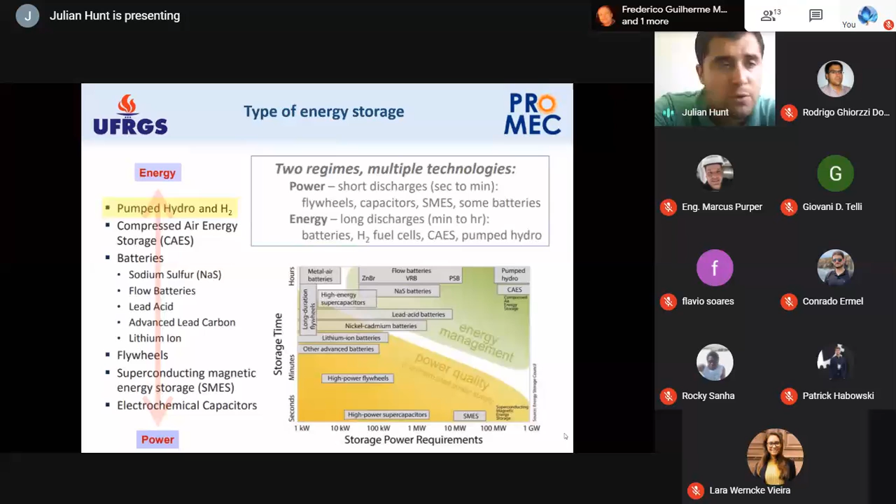You can liquefy and store it in tanks. Of course, you have some evaporation, because hydrogen has to be kept at very low temperatures, minus 253 degrees. But as the hydrogen evaporates, you can use the evaporated hydrogen, for example, to operate a generator and generate electricity for the plant. And you can use it for cooling, and for several other means.

Now I'm going to talk about the current trend of hydrogen and why a lot of people are paying attention to it. One reason is the oil and gas industry has not been very interested in investing in hydrogen - it has never been interested in investing in sustainable energies, because it always thought people would need oil, and oil would supply the world. If you stop producing oil, people are going to starve - you're going to have lack of food and a lot of problems in developing and developed nations. And this is true, right? We need a source of energy to supply our energy needs.

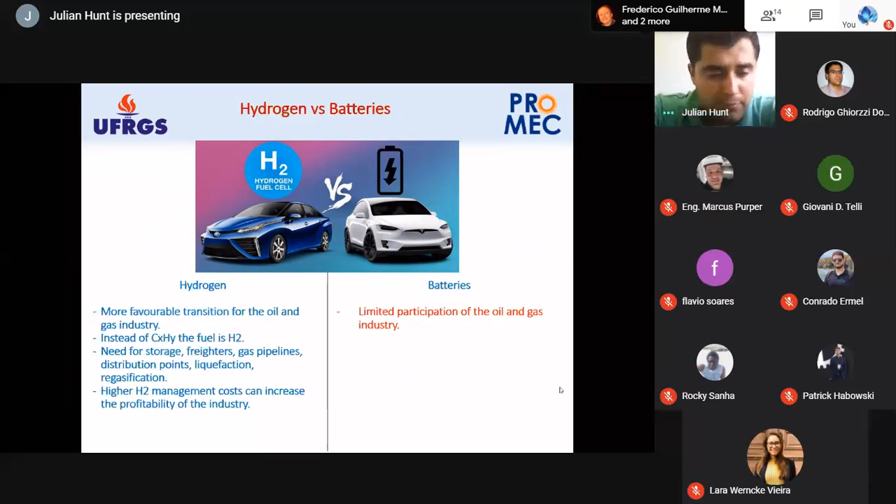So batteries are going to be very good for the electric sector. The electric sector will have 30%, 40% more customers to sell electricity. But on the other hand, the oil and gas sector will have fewer customers to sell their oil products.

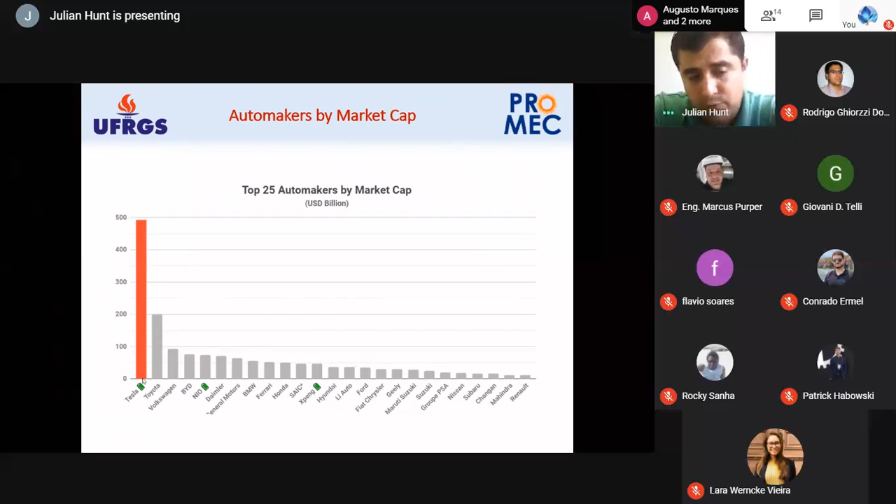This is the market capital of Tesla today. I always update this graph when I present it, and the difference keeps growing. For example, Tesla shares are worth around $500, and if you sum the six next ones - Volkswagen, Toyota, BYD, NIO, Daimler, and General Motors - then you have the market capital of Tesla. So Tesla has a lot of money and a lot of power with this money. They can change policies, they can build cheaper cars because they just have a lot of money. A lot of people are trusting in the company and investing in it.

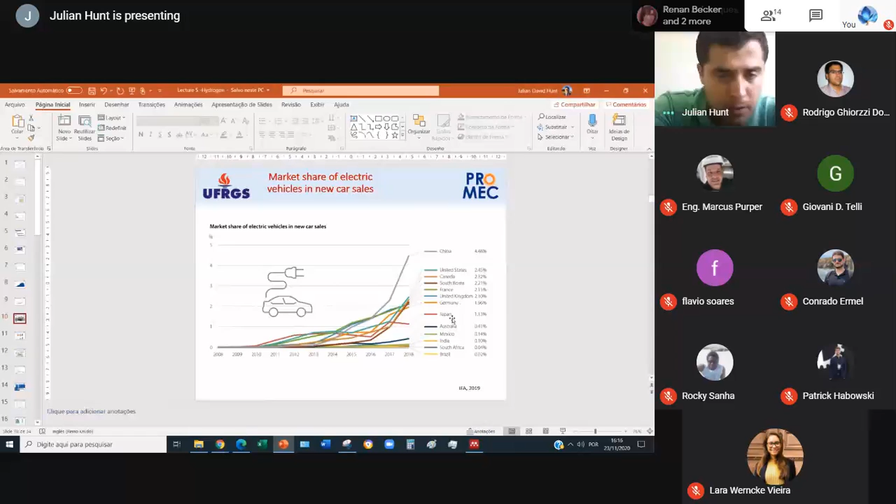It has to be either batteries or hydrogen, which is the future, right? But it will have a lot of impacts in every country in the world. So battery infrastructure requirements - you just need a plug-in. You don't even need to change the oil because you don't have an internal combustion engine; the engines are much simpler.

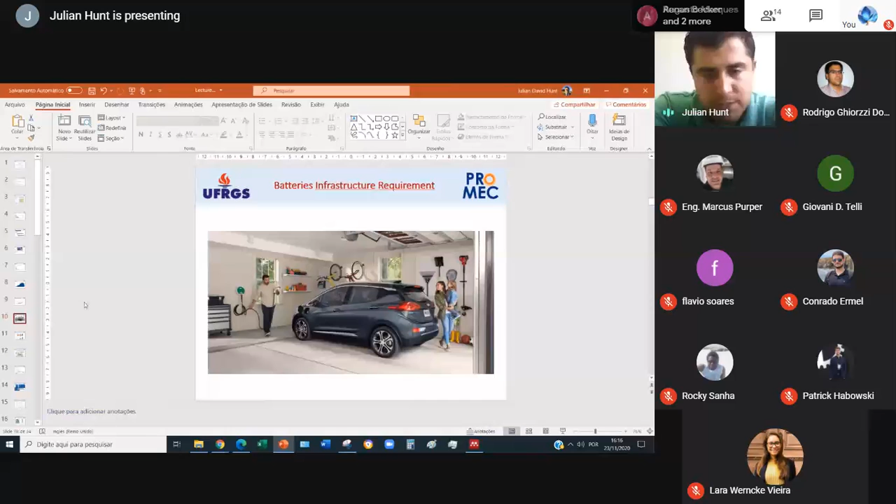So maintenance cost is much smaller, the complexity is much smaller, you don't have pollution - it's just electric.

And as I showed you prior in the first lecture, who is going to benefit a lot from this is the electric sector. The electric sector is going to make a lot of money, they're going to have a lot of jobs, they're going to have to increase their generation capacity and increase money investment in distribution, for example.

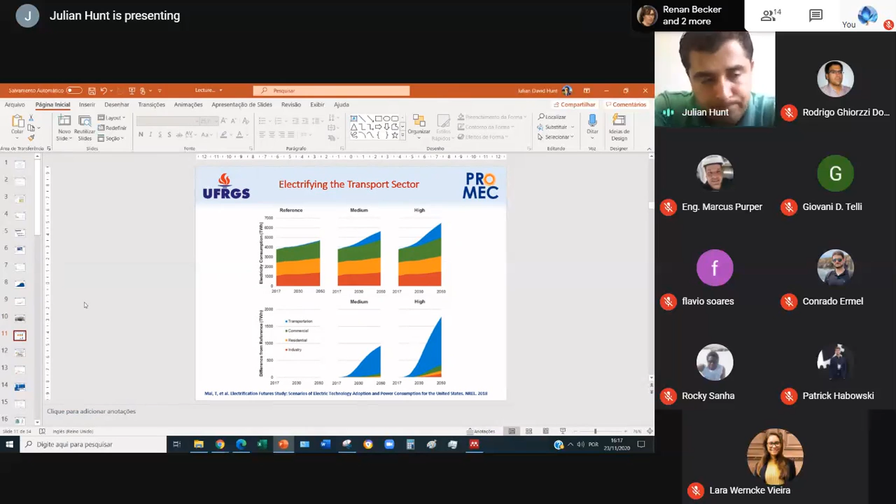Battery cars could even help with distribution because they can store energy, for example at night when people are not driving and the distribution system is sleeping, not being used. Usually transformers blow up around 4, 5, or 7 in the afternoon when demand is very high and they can't sustain the charge, so they explode. At night, transformers only explode if there are very high winds, thunderstorms and things like this - not really due to capacity of the transmission or distribution line, but more due to physical constraints.

On the other hand, a hydrogen supply future would look very similar to a natural gas industry, not so much an oil industry, but natural gas. You need pipelines, storage tanks, petrol stations, refineries - pretty much all the infrastructure that an oil and gas company has.

And the other problem is, if you don't need more of this infrastructure for gas, what happens to the petrol stations - they will have to shut down and the location won't be worth anything anymore because you won't sell to another oil and gas industry. You have to decommission all your pipelines, lay off people, which costs money, and you may have to go bankrupt. One of the options when going bankrupt is to ask the government to pay the bill.

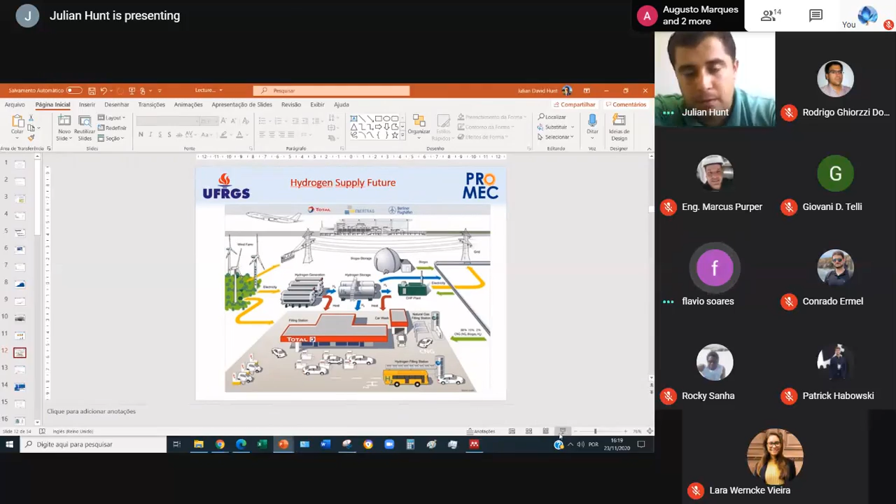142 megajoules per kilogram high heat value. High heat value assumes that after you burn hydrogen, you still manage to convert the steam that you produce into water. You also take the heat from the steam to condense it and put it back at 25 degrees - that's high heat. So the energy density of hydrogen at low heat value is around 120 megajoules per kilogram.

And the other fuels also have similar adjustments. We in Brazil, in Europe, usually use low heat value. In the US, they usually use high heat value. I'm not sure if you're aware of this terminology - if you want me to better explain, let me know.

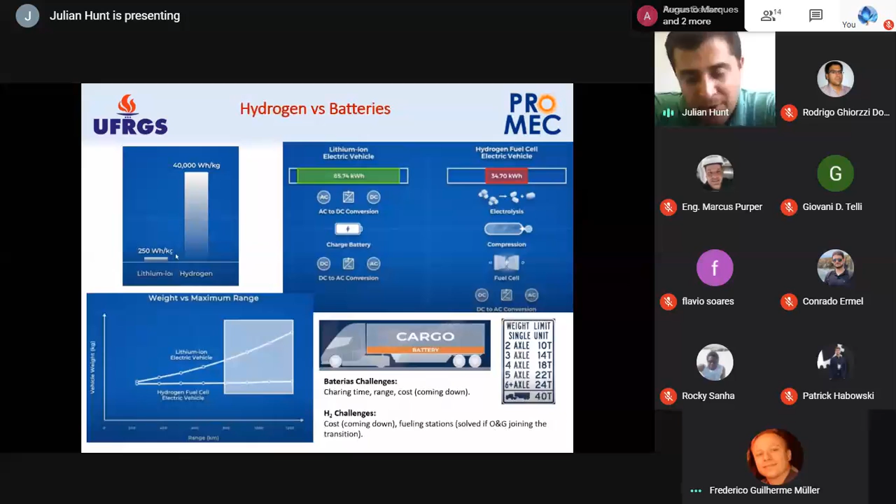I have no idea, so I'm just guessing a value here. I have no idea. But yes, I'll look at this in the battery lesson. Very good, perfect question, I'll have a look. All right, all right.

Thanks. But for example, this graph shows that battery planes will be very difficult to be feasible, because if you look at batteries and hydrogen, the differences are huge. And in a plane, weight is very important. So I think it's going to be very difficult to see battery planes in the future.

There's another thing nowadays: people are developing hydrogen batteries. What is a hydrogen battery? There are nowadays cell phones which run on hydrogen, but you don't fill up in hydrogen.

You have your phone, which has a slightly bigger storage battery. Once you plug in, you have two storage vessels inside the cell phone which split the water into hydrogen and oxygen, pressurized, at high pressure. When you unplug and want to use your phone, the phone turns the hydrogen and oxygen back into water, and you use your phone. So it's similar to a battery, but it's a hydrogen battery, not a metal battery like a typical one.

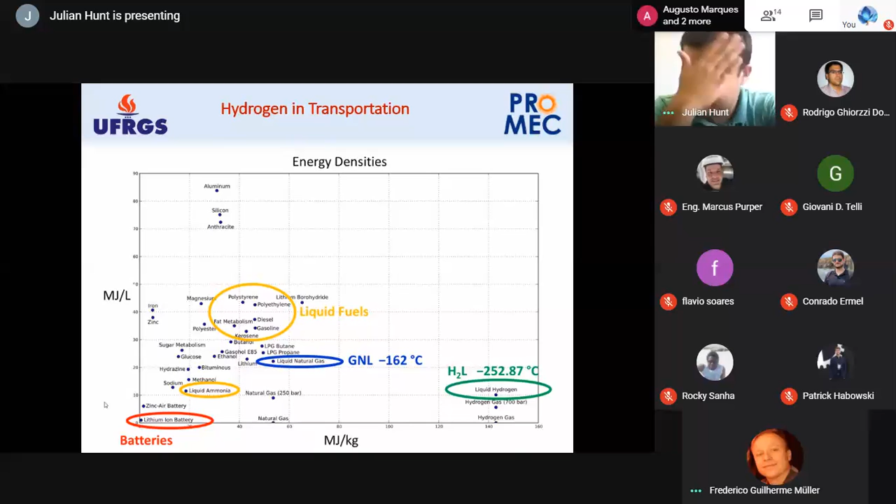This is interesting, I'll Google if I find one smartphone. I saw one right now, it's called Red Hydrogen One. I don't know if this is the one. I found it for $1,200, but I don't know if that's a little too much for me. So the only difference is that the battery lasts longer. I wasn't sure about this, I thought it was still in the research stage, but apparently they're selling hydrogen phones now. Incredible.

Those fuel cell types: you have two main fuel cell types, the proton exchange membrane cell and the solid oxide fuel cell. The main difference is that in the proton exchange membrane cell, the atom that passes through the electrode is hydrogen—protons, not hydrogen itself, just the hydrogen ion, the proton. It passes through the membrane, and the electron of this hydrogen goes through the electric system, and then you can use this current for electricity generation.

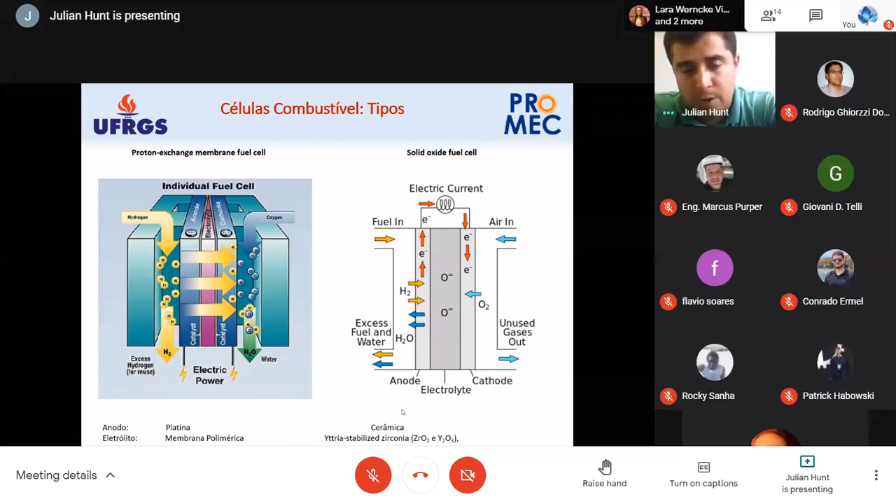So here we have another comparison, in a table, easier to follow. The operating temperature of proton exchange membranes is 80 degrees, solid oxide is 750. Proton exchange membranes take seconds, so you can drive a car really quickly - a sports car. Solid oxide takes longer, so it's going to be a car that accelerates more slowly, taking some time.

Maybe what you can do is put a battery pack to give you power for acceleration, and when you reach a certain speed, you run the oxide fuel cell to recharge your battery and provide power. Of course, you can always find a solution for the challenges you have, whichever technology you use.

Power density - it's lighter, so you have higher power for the amount of weight you carry, than oxide fuel cells. Oxide fuel cells are heavier - half the weight again, double the weight, or even 10 times the weight, depending on the fuel cell you use. Overall efficiency is 40% versus oxide fuel cell at 50%.

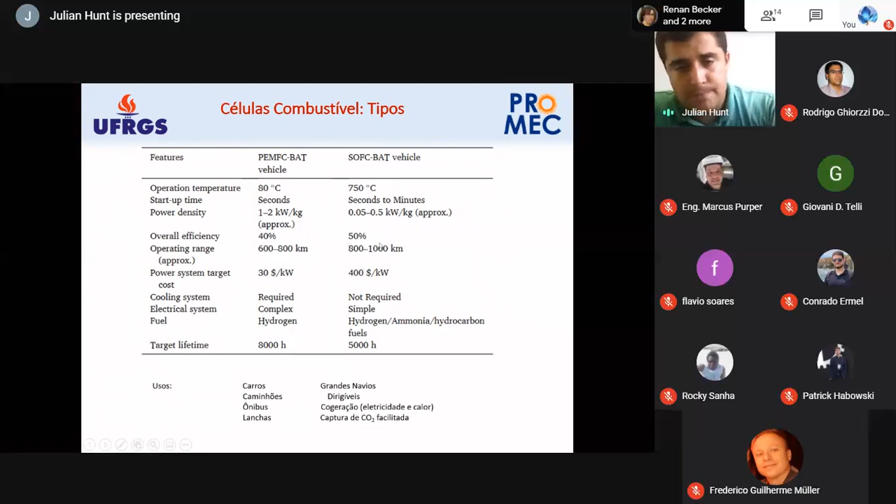Operating range 600 to 800 kilometers, 800 to 1,000 kilometers, mainly probably because of the higher efficiency. So with higher efficiency, you need less fuel in order to drive.

Power system targets the cost. The cost of proton exchange membrane is lower, it's cheaper. Solid oxide is more expensive. This one requires a cooling system to keep the fuel cell cool, which also adds weight to the system. But the oxide fuel cell doesn't.

Actually, you have to recycle the heat in order to increase the efficiency. You need to increase the temperature in order for the oxygen to be able to pass through the ceramics.

Here the electric system is complex, here is simple. For fuel, you can use hydrogen, and for oxide fuel cell you can use hydrogen, ammonia, ethanol, methane, diesel, gasoline, and other hydrocarbons. The target lifetime is 8,000 hours, like 8,000 hours, 5,000 hours.

So these are the types of uses: cars, trucks, buses, ships, lunch... sorry, I don't know how to say lunch in English. I never drove a lancha in Europe.

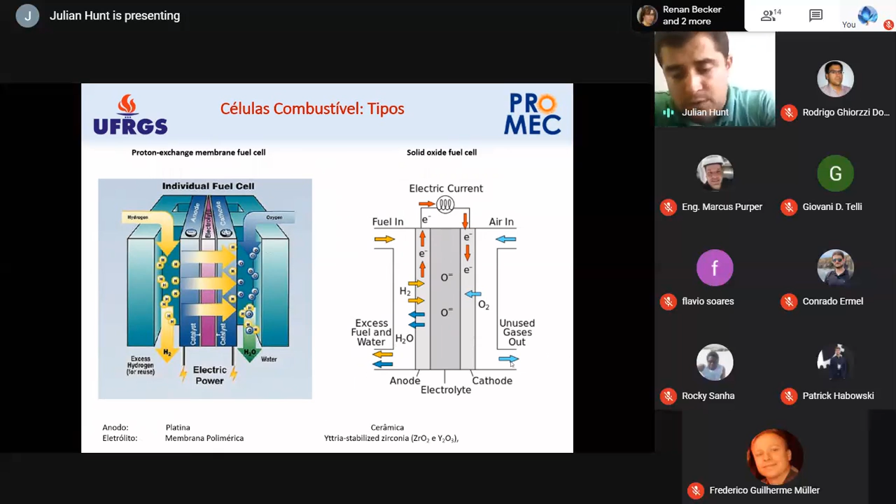CO2 and nitrogen is very complicated to separate. The cost is very expensive. So this is a very good technology for carbon capture storage.

Looking at the volume and weight, for example, nowadays we have a very thriving industry for natural gas. This is liquid natural gas: one tanker of 50,000 tons with the same volume. To carry the same volume as liquid natural gas, you need two tanks to carry liquid hydrogen, and the weight of both of them adds up to 20,000 tons.

So you have to double the volume, but the weight reduces to half, which is convenient for energy efficiency because you need to carry less cargo. But you have to invest more money in bigger ships, which will cost higher. The investment costs are higher, but operational costs are smaller. Of course, it takes a lot more energy to liquefy hydrogen than to liquefy natural gas.

Much more energy. But we're talking here about transporting the liquid hydrogen already in liquid form. Liquid natural gas compared to ammonia: you also need two tanks with ammonia, but this ammonia will be much heavier than the liquid natural gas. So you're going to need much more fuel in order to transport ammonia. Sorry, I didn't put ammonia here.

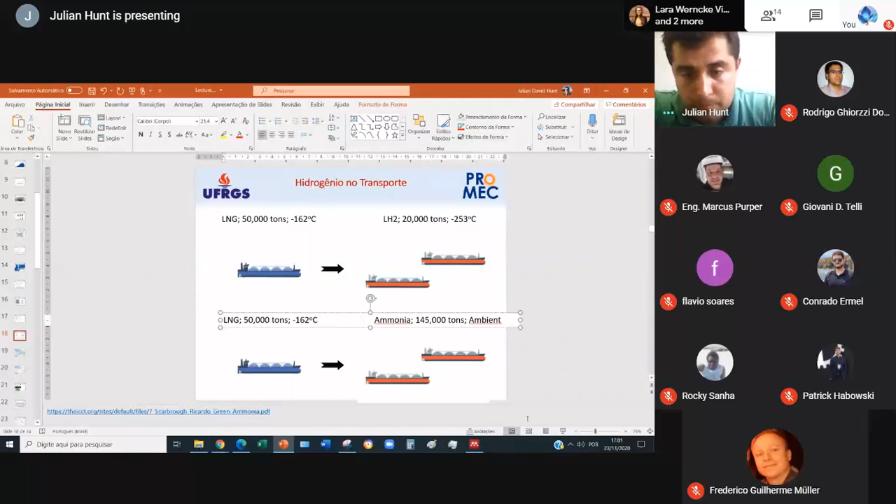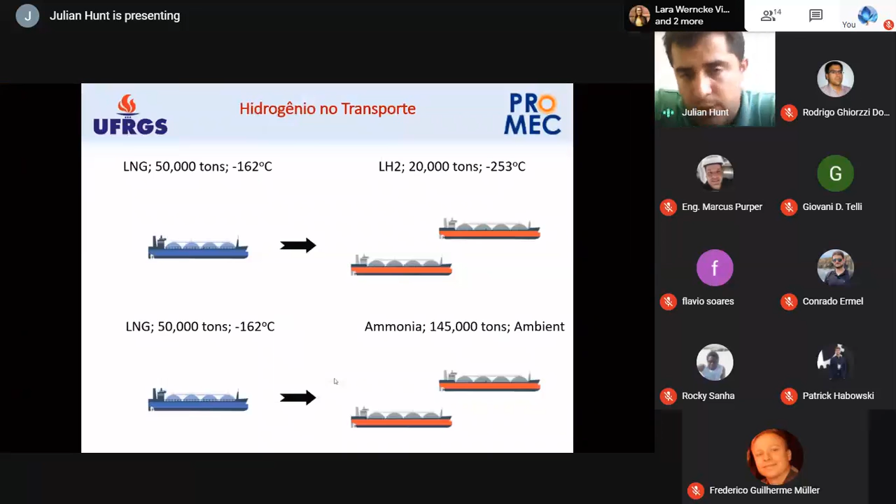Then you have your hydrogen, and you produce toluene on the other side of the world where you sell your hydrogen. The only problem is that you don't only carry hydrogen, you also carry toluene, and it turns out that's equivalent to carrying wood.

So if you want to transport wood to burn, for example, sell wood in Brazil to burn in Europe, it's expensive because wood is heavy and the energy density of wood is low. You have to spend a lot of energy in transportation to carry it to the other side of the world. So transporting hydrogen is one of the highest challenges for the hydrogen industry because it's very difficult to pressurize, very difficult to liquefy, costs a lot of money, and you waste a lot of energy doing this.

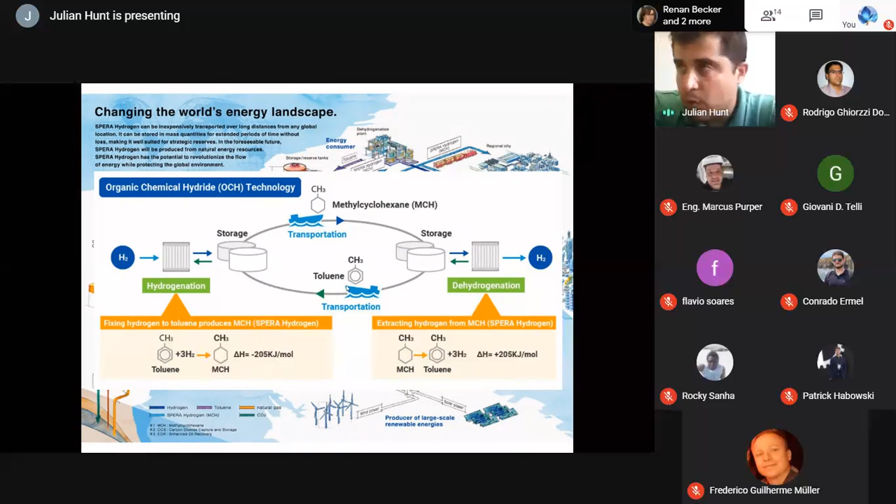Nowadays, a lot of people around the world are trying to think how to transport hydrogen very cheaply. I am one of these people, actually. I published a paper in Energy Conversion and Management entitled 'Using the Jet Stream for Sustainable Airship and Balloon Transportation of Cargo and Hydrogen.'

So hydrogen is a lighter than air gas. My suggestion in this paper is to fill up very large balloons and let them fly in the atmosphere, and then the winds from the jet stream, which usually happen in these sections of the world around 30 degrees latitude and minus 30 degrees latitude...

That reaches average speeds of 150 kilometers per hour, so very high speeds, and they are very constant. Why are they constant?

So why does this jet stream happen? You have very cold weather in the North Pole and the South Pole, and what happens is that the temperature at the equator is much higher. When the high temperature of the equator reaches the North Pole, it rises, and when you rise in the atmosphere, the pressure reduces.

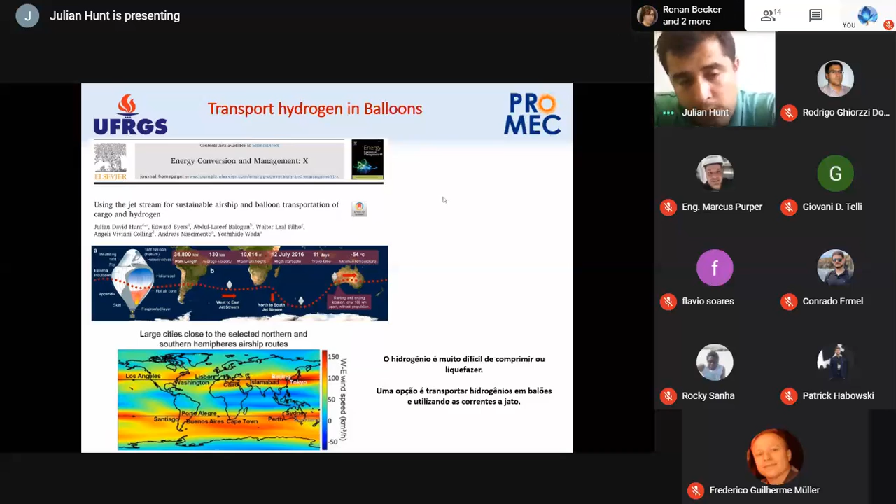So now we talked about transporting hydrogen. Now we're going to talk about the global experience of hydrogen.

Hydrogen is already a big thing in Japan. There's a lot of investment in companies developing every type of different application with hydrogen, and the future is hydrogen. In Japan it's always in the future, and they already have several solutions. If you know how to speak Japanese and look in Japan for hydrogen solutions, you'll probably find anything you can think of.

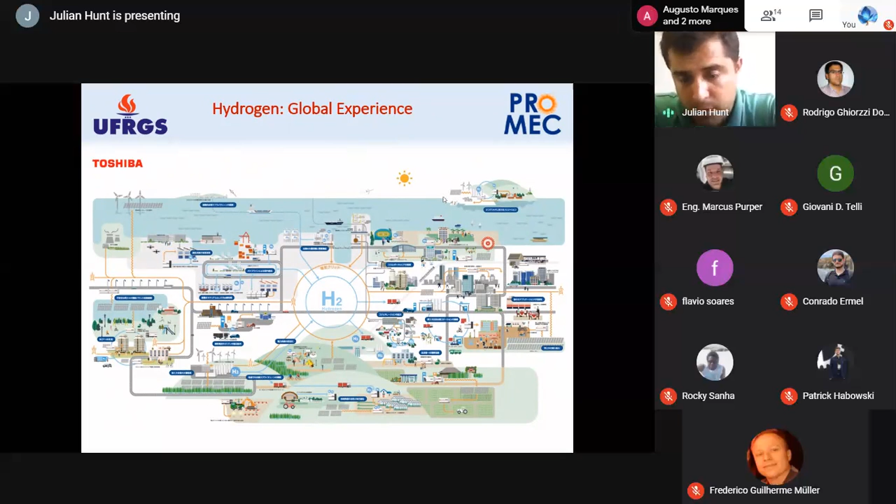One of the reasons Japan is so focused on technology advantage and innovation is because they don't have natural resources and need to sell patents and technologies. If they stop innovating, they'll become a very poor country, because they don't have the influence that the US, Europe, or the UK has to manipulate commodities. That's how the US and England make money, but Japan doesn't have this influence. So the only way they can remain a competitive country is to innovate, and they know this very well, and they're doing it at the moment.

So, closing up this topic of hydrogen and the oil and gas industry. The oil and gas industry realized that hydrogen is the future. In order to keep the oil and gas industry existing, they have to invest in hydrogen, because a lot of countries are investing in sustainable solutions. Hydrogen is a sustainable solution, so let's invest in hydrogen.

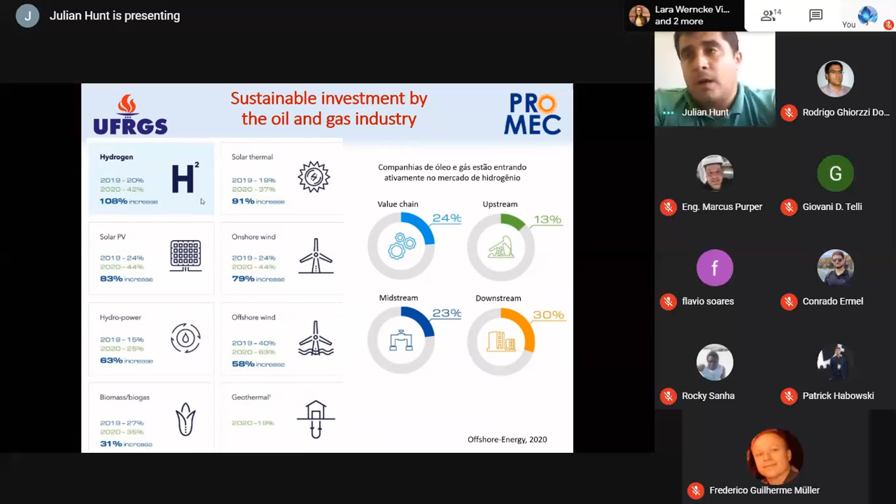From 2020, the highest increase in investment in oil companies was hydrogen, which multiplied by 100% compared to 2019. So, for example, if you want to do a research and development project now, and you have a hydrogen project, the likelihood that you get financed is high, because everyone wants to invest in hydrogen today.

Talking about hydrogen consumption, nowadays energy is supplied by fossil fuels. Gas supplies around the world on average 40% for heating and cooling, 30% for industry, for example the steel industry and cement, and 30% for power generation.

Oil supplies the transport sector, the air industry, shipping industry, petrochemicals, buildings and power. For example, diesel supplies electricity in people's houses. So this is the share of how much energy is consumed around the world with gas and oil.

And hydrogen can replace all of these but one of these solutions. I want to ask you, which of these will be the most difficult to replace? I mean, maybe they can't exchange all of these. For example, in industry, it's probably a challenge. Anyone want to guess?

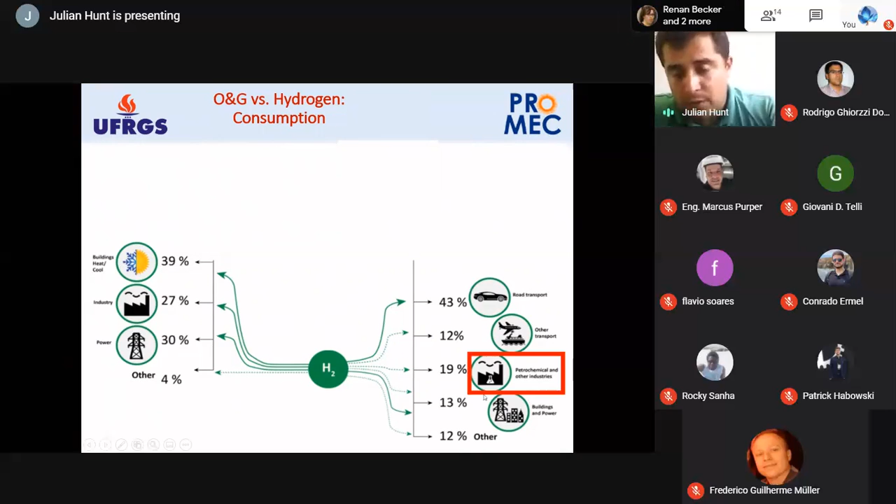The one that's very difficult to change is petrochemicals. The reason is because hydrogen doesn't have carbon. In petrochemicals, you need to create molecules like plastics and pharmaceuticals, which require carbon. Hydrogen is the only major fuel that doesn't have carbon. So this will be very difficult, I'd say impossible to supply with hydrogen. You have to find other solutions, like biomass or recycling, to supply the petrochemical industries, because hydrogen can't, since it doesn't have carbon.

But almost everything else, right? So it can do a lot of things, which is great.

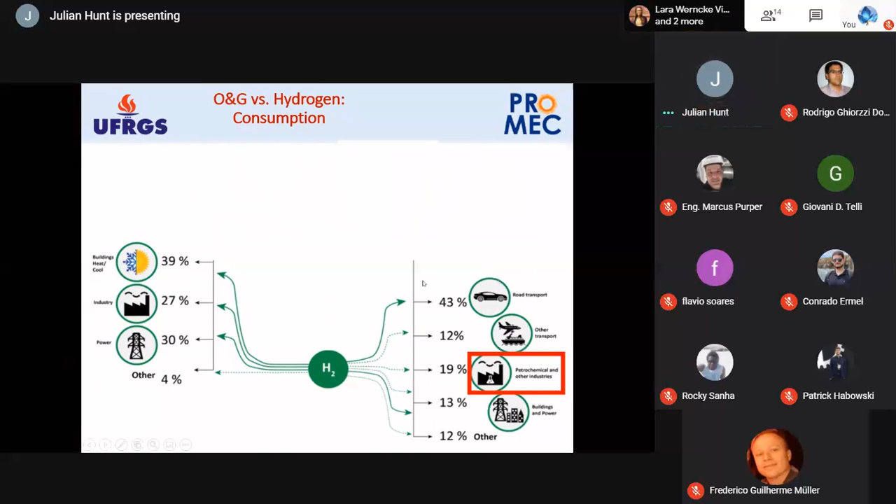This is very convenient because the hydrogen industry needs renewables, right? But the renewable industry also needs hydrogen because it's intermittent and variable, you can't rely on it. So hydrogen will come, apart from everything else I've talked about, as an energy storage solution for renewables. It's a win-win for hydrogen and renewables. It's great.

The other solution is using fossil fuels. You can use natural gas to pass through the steam methane reforming process and produce gray hydrogen. Steam methane reforming produces around 95% of the hydrogen today in the world, and it's all gray hydrogen, but the demand is not extremely high, for example, as methane demand. It's very tiny, only for certain industry and petrochemical demands.

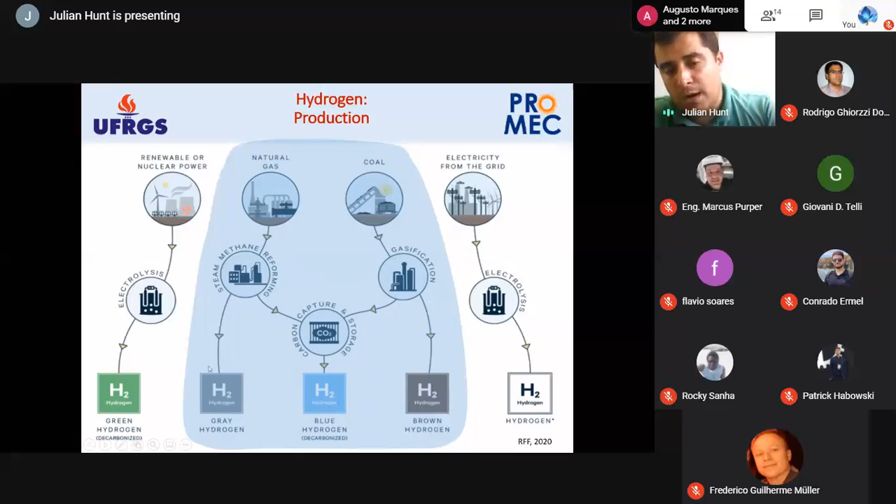In the gasification, you also produce methane, which you can use. You can also have a steam methane reforming process after the gasification to produce more hydrogen, but you would still be brown hydrogen.

So this is kind of the life cycle: you have fossil fuels, biomass coming in, you gasify, you store the CO2 in the ground, you get clean hydrogen, you compress it, and then you sell and distribute for your appliances. Or you can liquefy it and transport in tankers or ships for far away.

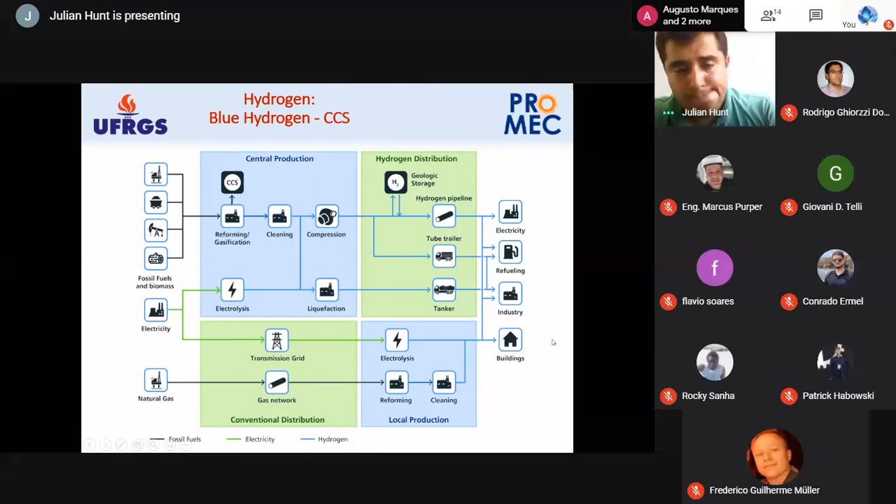These are the other ones: electricity, electrolysis. With electricity, of course, if you can use electricity directly, you don't need to turn it into hydrogen - you just use it as electricity. So these are the types of hydrogen produced now.

So hydrogen stations will come up, people will start driving hydrogen cars, and other appliances for hydrogen solutions will become viable and come to market. So they will pay this price of polluting the environment just to kickstart an economy with hydrogen. Then afterward, they will replace this gray hydrogen, produced from natural gas, with blue hydrogen, which is natural gas with carbon capture storage. They are very optimistic about this, but personally, I don't think it's very easy to store the CO2.

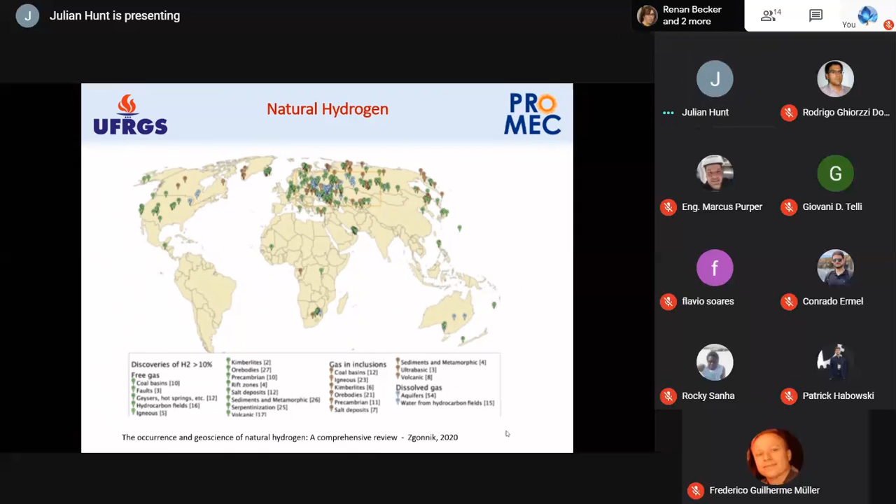There is another very interesting concept that I want to share with you, which is another issue that a hydrogen economy results in. Because, for example, if you take water from the ocean and you use electrolysis and you burn hydrogen, you produce water. But the problem is that if you don't burn the hydrogen and it escapes to the atmosphere, what's going to happen is that it's going to rise very quickly up to the thermosphere.

At the thermosphere, at something like, from 50 kilometers high to 100 to 500 kilometers high, you have the thermosphere, and there are barely any molecules there. So, for example, a hydrogen molecule becomes atoms, ions, and they also meet with oxygen ions, and they merge and produce water. So some of this hydrogen comes back to the Earth in the form of water. But a lot of this hydrogen that reaches the thermosphere escapes the Earth's atmosphere.

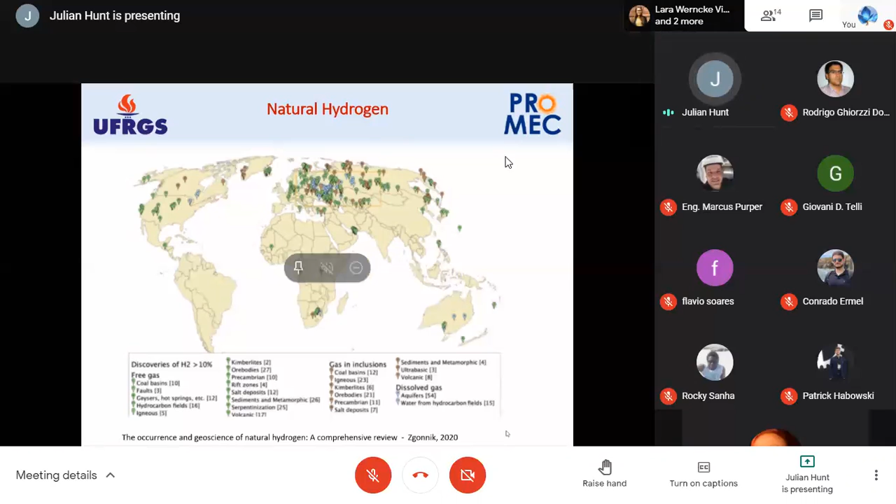So there is a problem: if we produce a lot of hydrogen and use it, and it increases the leakage of hydrogen from the crust of the Earth, what's happening is that you're going to reduce the amount of water that you have on the Earth. So the sea levels will eventually start to reduce because you are consuming the water, and the hydrogen escapes the atmosphere while the oxygen stays in the atmosphere because it's much heavier.